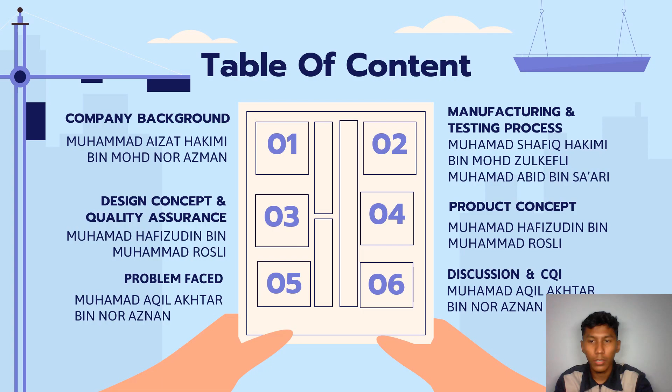For the table of contents, the company background will be covered by Muhammad AIZAT, and the manufacturing and testing process by Muhammad SHAFIQ HAKIMI and Muhammad ABID. For design concept and quality assurance, HAFIZUDIN. Product concept, Muhammad HAFIZUDIN. Problems faced, Muhammad AKHTAR. And lastly, discussion and CQI, Muhammad AKHTAR.

This is our team member. From the left side, AIZAT HAKIMI, ABID, SHAFIQ HAKIMI, HAFIZUDIN, and AKHTAR.

Assalamualaikum. My name is Muhammad AIZAT HAKIMI bin MOHD NOR AZMAN, and I will be presenting about the company's background. The vision of this company is to offer consumer-friendly LPG products, market a safe LPG composite cylinder, and become the best in Malaysia and the largest composite cylinder manufacturer in the Asian region.

Mission of this company: first, maximize value to shareholders by ensuring stable, sustainable, and profitable growth. Second, enjoy and satisfy customers by offering high-quality LPG products, easy to manage, secure, and paying attention to customer needs and value-added services. The third one, utilize and provide ICT support systems with the latest technology to assist LPG services, customer management, and distribution network management, as well as logistics.

The fourth one is implementing a robust operating system and continuous improvement of LPG facilities and the implementation of good governance according to the standards of HSSE, health, safety, security, and environment. And the last one is attract, retain, and enhance the talents of the workplace by investing in personal and professional development towards the formation of a high quality employee mix.

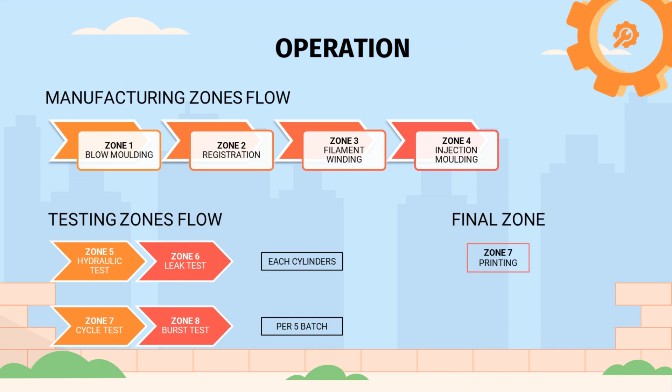Assalamualaikum warahmatullahi wabarakatuh. My name is Muhammad Shafiq Hakimi bin MOHD ZULKEFLI, and I will present about the operation for the manufacturing zone. Zone 1 is the blow molding. The material used in this zone is HDPE and Hyperion. The material will be mixed in the mixer. After that, it will be molded to produce a vessel that contains the LPG, which is the liner. Then the reaming process will be done after the product has been cooled in the cooler, to smoothen the inlet of the liner for maximal secure fitting of the O-ring.

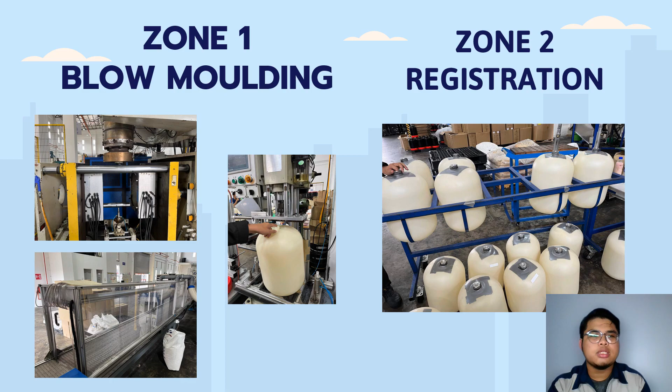Then zone 2 is the registration process. The RFID sticker will be put on each cylinder as the identification code for each cylinder, and it will detect all of the zones the cylinder has gone through. Then it will go to the valve installation station.

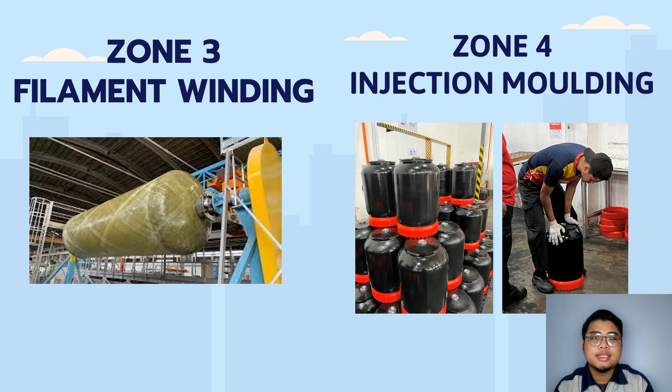Next zone is the filament winding zone. This zone uses the process of dry winding or helical winding. The material used in this process is aramid fiber, and this company is the first company in Malaysia using aramid fiber to manufacture the composite, and the objective of this process is to give the LPG composite cylinder its main strength. Zone 4 is the injection molding. The material used in this process is polyurethane polymer to give the outer layer and black color of the product. After that, the footing is inserted before going to the testing zone.

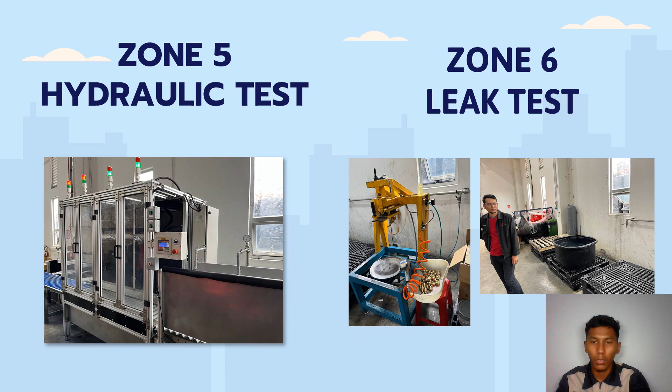Assalamualaikum warahmatullahi wabarakatuh. My name is Muhammad and I will present about the testing zone. Zone 5 is the hydraulic test, where the objective is to test the strength of the cylinder at 30 bar by adding liquid into the gas cylinder. Zone 6 is the leak test, where the gas cylinder is put into water to check for leakage.

Zone 7 is the cycle test, where the objective is to test the lifespan of the gas cylinder. And zone 8 is the burst test, which tests the strength of the gas cylinder. For these two tests, only one gas cylinder is needed for every 5 batches of the product.

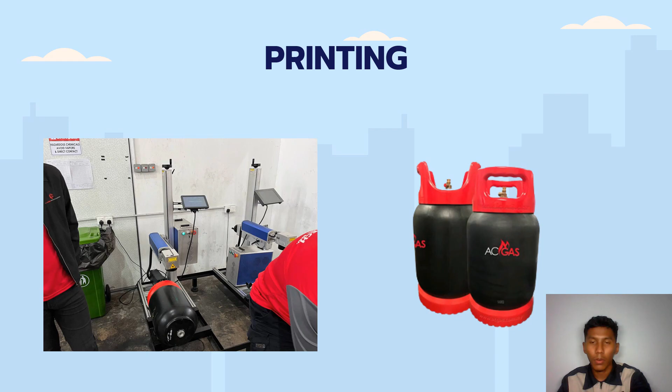Lastly, for the printing process, the product logo and batch number will be printed on the gas cylinder using a laser machine, and this is the final product of the gas cylinder.

Assalamualaikum warahmatullahi wabarakatuh. My name is Muhammad HAFIZUDIN bin Muhammad ROSLI. I will present about design concept and quality assurance.

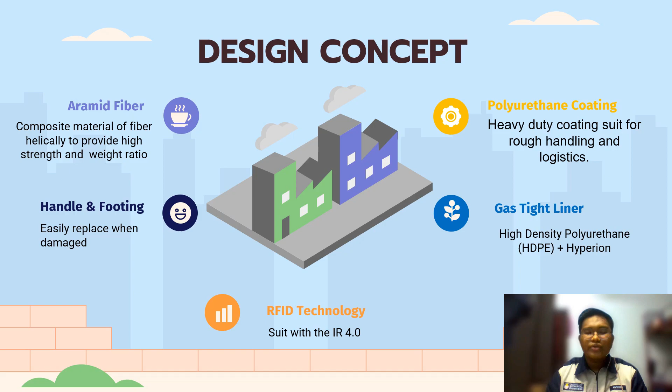Then the gas-tight liner is high density polyethylene, or HDPE, plus hyperion. And lastly is RFID technology. This is suited for IR 4.0 applications.

The quality assurance is divided into 6, the first being design stability, with a base and height ratio proportioned to lower the center of gravity. Next, the product produced is light and efficient. The product is lightweight and user friendly. Next is non-corrosive, meaning the product does not corrode and has a 15-year lifespan.

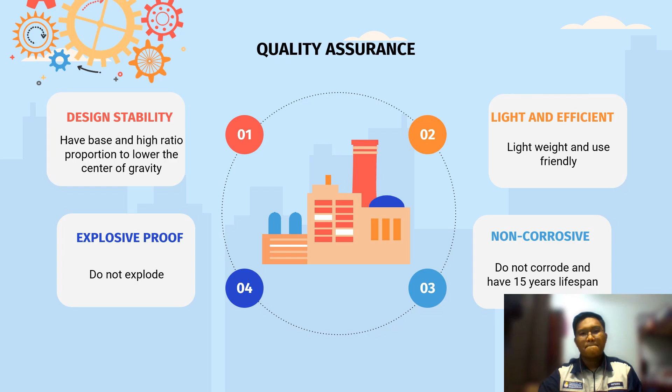Then explosion proof, meaning the product has been tested and proven not to explode. High-tech and reduced maintenance, as this product uses RFID as a high technology that can store the birth

certificate of the product. Reduced maintenance: the high quality heavy-duty polyurethane coating can be a recycled material for the sidewalk at the park. And lastly, the product has an aesthetic design, which can be more appealing for home decoration.

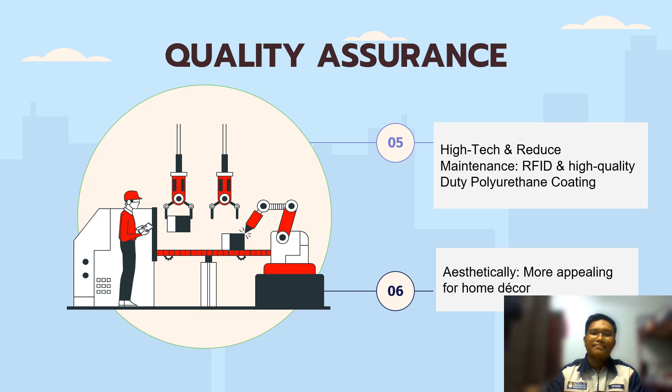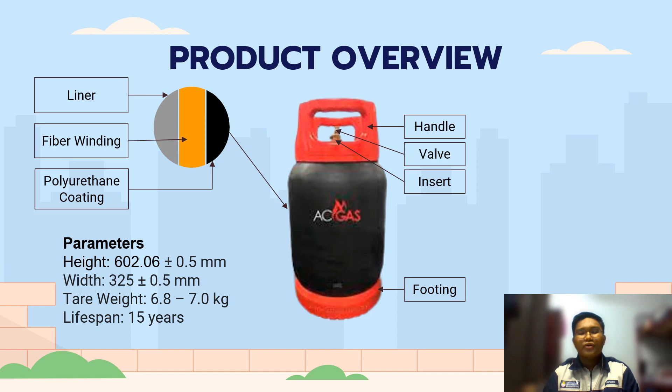Next is the product concept. As you can see on the slide, the product is produced for the Evo High-Tech company. This is the product overview. For the main part, the product has 3 layers, which are the liner, fiber winding and polyurethane coating. The product also has a handle, valve, insert and footing. And those are the parameters of this product, as you can see on the slide.

So I will start with the problem faced by the company. The problem faced by the company during production is bubbles. There are bubbles on the surface after injection molding. Because of the bubbles, they need to do a surface finishing process, which takes a few minutes to do. These bubbles happen due to gas interference problems, insufficient plastic injection, or low injection pressure.

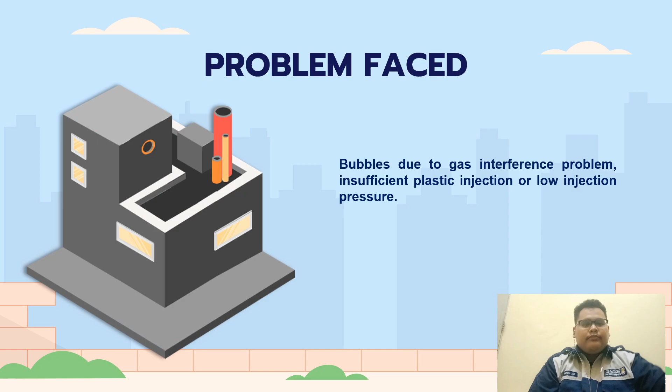During the discussion, we found ways to improve the LPG composite cylinder. First, mechanical fasteners such as screws can be used to connect the handle and footing parts to the body of the LPG composite cylinder. Screws make the connection between each part stronger. Screws can also be easily removed and replaced with only a screwdriver.

Other than that, during the discussion, we also found ways to avoid bubbles on the product. To achieve that, they can utilize a vacuum chamber where the mold is placed completely inside a controlled environment. Then, a properly sized vacuum pump and accumulator tank are used to remove air completely within the chamber before or during injection.

For continuous quality improvement, first they can improve the injection energy, pressure, speed, time, material amount, and improve the back pressure to make the filling more full. Secondly, they can increase the material temperature to make it flow smoothly.

Other than that, they can also reduce the material temperature to reduce shrinkage and appropriately increase the mold temperature, especially the local mold temperature at the part forming vacuum bubbles. Next, they can improve the exhaust status of the mold regularly as predictive maintenance.